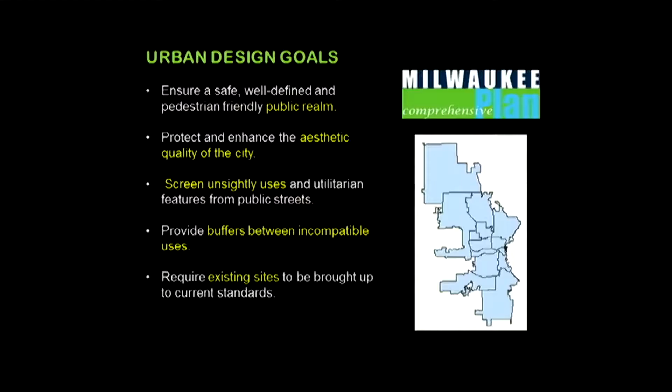Equally as important, or possibly more important, becoming more and more important nowadays, especially since the last code was revised, is environmental goals. We all know Milwaukee is going to continue to see more intense storms. We can either try to build our way out with increased sewer capacity, more deep tunnels, or take the approach of green infrastructure, which we're doing citywide. We've recently updated our Chapter 120 stormwater requirements, but the idea is there's an environmental purpose, not just a design purpose, to this landscaping.

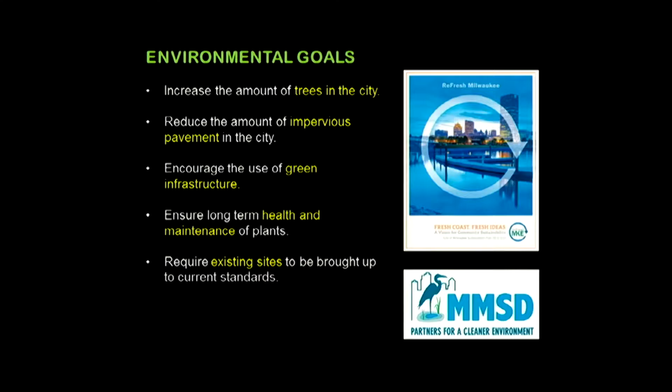So how do we encourage properties to capture rainwater where it falls, keep it out of the combined sewer system, keep the crud from getting into our rivers and lakes, so we can protect those resources for many generations to come. That was interwoven into this as well.

Part of the reason why I show these three types of goals is to say that they don't always go hand in hand. It's hard to make things good for the environment and easy on business, or to provide that urban edge while also capturing stormwater. So that lays the framework for when we went about developing this code, why when we put something in there, we made sure it was important for a specific purpose.

Back to the customer service element real quickly. I don't expect you to read anything on here, just as a message to see how this was the old table, and how intimidating it could be when you were first told your parking lot has to comply with 295, 405 of the landscape code or zoning code. This is the first table you'd be pointed to.

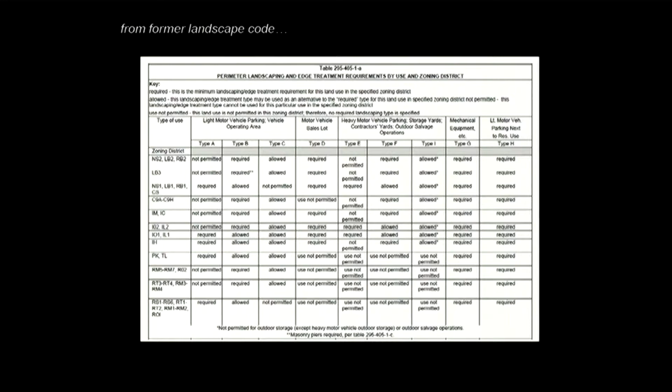Generally you had to figure out what use you were trying to screen, what zoning district you were in, and depending on that there are various types. Some types are prohibited, some are required. You generally have a type required and then a type allowed, and it wasn't always clear how one could be required while another was allowed. It wasn't always the clearest to understand, especially for small business owners trying to do a small project. But this table was just to figure out which type you may need.

Once you figured that out, then you went to this table, which is equally as intimidating and very prescriptive. It grew over time as we tried to build in that flexibility, tried to build in new types, and sometimes they contradicted each other, with asterisks, and things just grew over time.

So when looking at how we could make this code more user-friendly, we made the decision to start from scratch and think about what's really important. So that's the new table—much bigger, much more contrast, and there's no types, there's options.

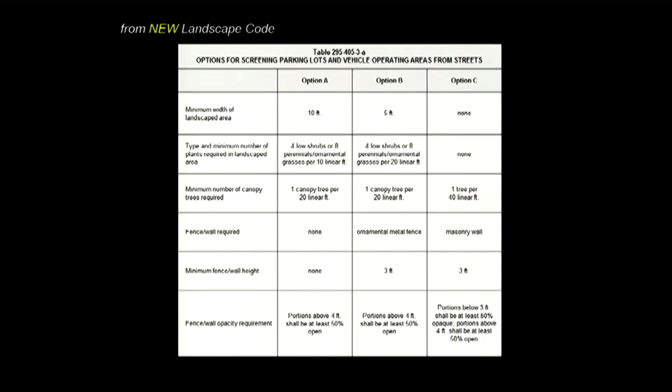If you have a parking lot, you have basically 3 options you can do. It's the same citywide, so there's no different standards for our more suburban districts than our urban districts. There's options, and depending on your specific site and its needs, you pick which option works best for you, or a combination of them.

You may have a site in a suburban district but you're really tight for space—a small site that happens to be in a more suburban district, or vice versa, in an urban district where you have the space to provide that green space. We should promote and incentivize that if you can do it.

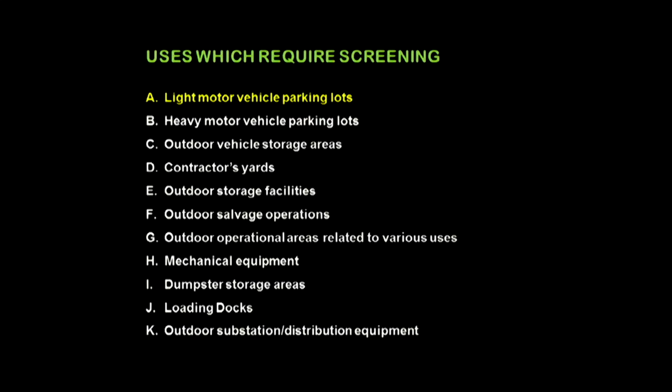We require screening, mostly landscaping along the street edge, for a lot of uses. Today I'm going to focus on parking lots, because that's what we deal with every day. That's the most common thing, and that's what the guide is designed to address: landscaping and screening for parking lots. There's also a series of other uses, like outdoor salvage, that require landscaping and screening, but you'll have to go to the code to figure that out. Today we're talking about parking lots.

Basically, there's 3 requirements. There's screening from public streets, which is really about that urban design, that pedestrian friendly, making the city look good landscaping along public streets. There's screening from residential districts, which is basically about protecting a neighbor from what might be going on in the parking lot, from headlight glare, noise, dust, those types of things.

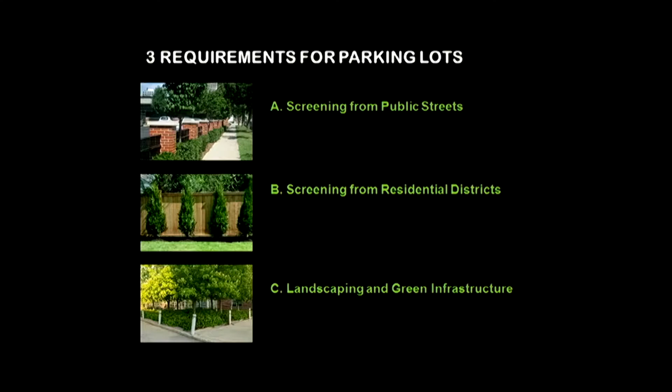A subtle but key change in this is it's screening from residential districts. It used to be screening from residential uses, which meant if you had a home in a commercial district next to you, you'd have to screen that home, even though you're both in what could be a dense local business district. Now, if you have a residential use in a local business district, which is allowed and encouraged, but you're in a commercial district, the screening is about protecting residential districts from commercial and industrial districts.

And the last is landscaping and green infrastructure overall. Now, your screening from streets and districts counts towards that overall landscaping, which is another key change that I'll get into in a little bit.

Real quickly, screening from public streets - why do we require that? Well, it's about promoting a well-defined and pedestrian-friendly public realm and making sure the city looks nice. So we can't just pave up to the sidewalk everywhere, because if it happens here or there, it can get by. But when you have whole corridors where it's just asphalt, where the building edge has been eroded and that's not mitigated, it's really hard to make a nice, vibrant, pedestrian-oriented district.

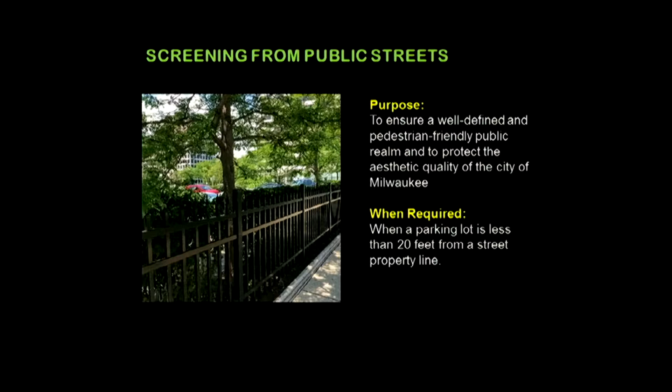And similarly, it's hard even in suburban areas when you have that - it just doesn't look attractive. So that edge is really key. It's required when the parking lot is less than 20 feet from the street property line. So if you have the space and want to set your parking lot back 20 feet from the property line, this doesn't apply to you. But you have that benefit for having that space, that pervious surface in between, where you can accomplish some other landscaping.

So this is the table from the guidebook. You can look along in the guidebook, but basically it's 3 options.

Option A is a nice, generous border. You don't need any fence. That was a big thing - we used to require fences in almost all of our districts, and a lot of people gave feedback saying, why do you require the fence? It has no ecological function. It's not sucking carbon, it's not sucking stormwater. Why do you have the fence? It gets knocked over. Of course, the architects would say that fence is key to creating that urban edge. So as a trade-off now, if you give us a nice, generous border, big enough where the trees are actually going to thrive, they're not going to be these twigs - they actually grow into nice, mature trees - you don't need the fence.

The second option, if you have a more standard border like we've always required, you give us that decorative metal fence and your trees. It's similar to what we currently have, but with less shrubs, about half as many as we used to require. The former code had something like 2 rows of shrubs spaced 4 feet on center in each row. So it was very prescriptive - it basically mandated a hedge.

So hedges are nice, we like hedges. If you want to do a hedge, you're more than welcome to. But what happens if 5 years later one of the shrubs dies and it comes out, and all of a sudden that person's non-compliant with the code? So we said, in the spirit of flexibility, allowing landscape architects creativity, of course you can provide us a hedge, but that's not all you can do - you can do other things. One thing we added is you can now do ornamental grasses, you can do perennials. So there's a variety of ways you can meet that lower edge requirement with less shrubs.

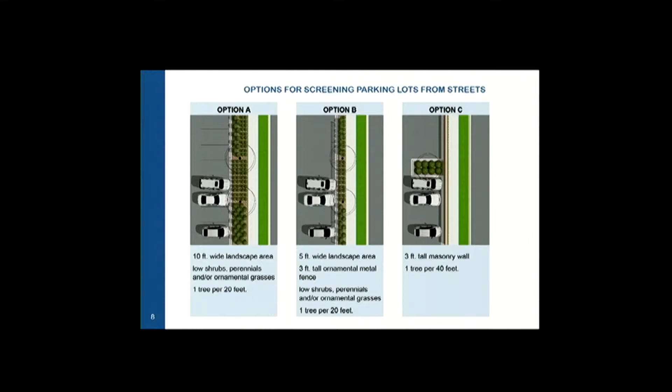Three options, citywide, for parking lots. Doesn't matter if you're in LB1 or RB2, or if you have a parking lot for a grocery store or an apartment building. It's the same across the board. If you have a parking lot in the city of Milwaukee, you pick one or a combination of these options whenever your parking lot is less than 20 feet from a public street.

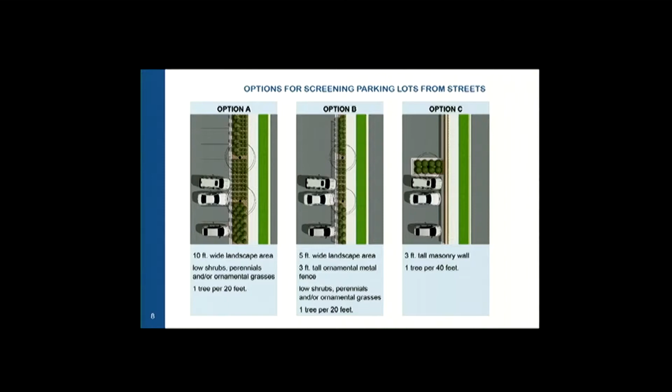So option A, as I said, a nice wide border, no fence, shrubs, perennials, or grasses, or a combination. This shows a little bit more robust than we'd actually require, and a row of trees. Another thing about the trees is we do require one tree every 20 feet of frontage, but they don't have to be 20 feet on center. So you take the frontage you have, divide it by 20, and that's how many trees you have, and you can group them. You can put them wherever they're going to grow the best, put them where they're going to thrive. There are some limits on how far you can go without a tree.

And another key point is the trees in the right-of-way now count. We heard a lot about, we'll have a street tree there, I can't plant trees because they're going to get shaded out. We can debate whether that's true and what type of species can do, but then it would go to a Board of Zoning Appeals case. So it's just, no, if you have a tree in the right of way, it counts. Now if that tree later gets cut down, you wouldn't be in compliance any longer, but that comes specifically in handy when you do option C and you don't have the space to deal with it. So it counts in the public right of way. We went back and forth about whether that should be the case.

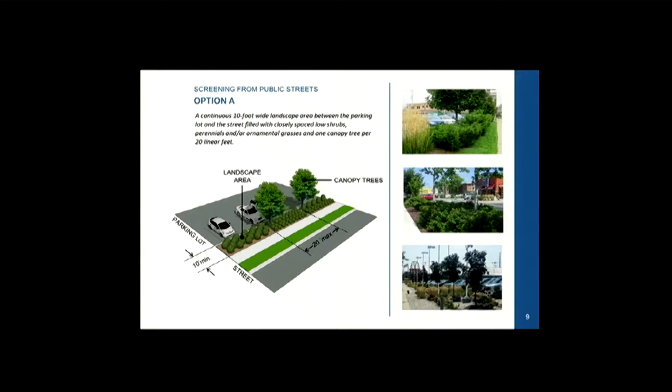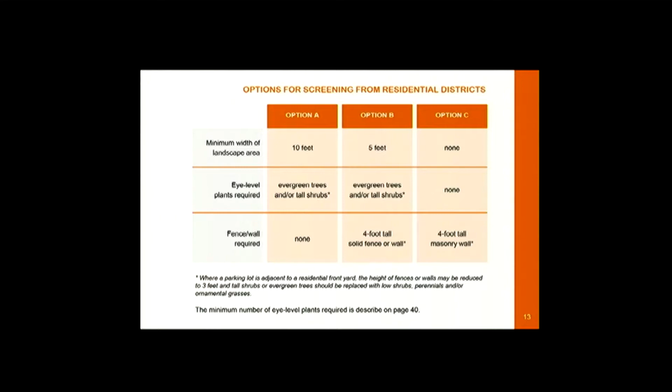The next type of requirement, screening from residential districts. This is less about the street edge, about the urban design, quality of public space. This is about protecting neighbors from noise, dust, headlight glare, those types of things. The old code would basically require a wood fence and a row of tall shrubs or evergreen trees. You can still do that now, that's option B. These options are very similar, same concept as the last ones, right? Option A would give us a more generous border where you can really grow that dense vegetation, we don't need a fence. Or if you just don't have the space, put up a masonry wall, something permanent, that can give us confidence that the residential district will be protected.

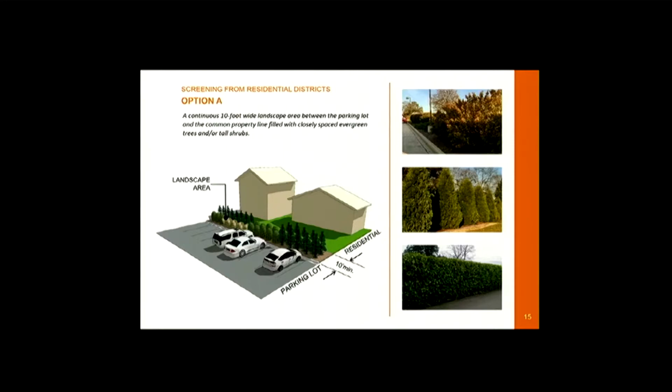So again, now in the street edge landscaping, we want visibility. We want to be able to, we don't want to hide the parking lot, we want to define the spaces. In the street edge landscaping, we want to be able to see in. When you're protecting from a residential property, we want opacity. And this is also the case when we're screening salvage yards or things like that, kind of things where we don't want to see versus things we want to see. In the street edge, we want to see in, we want to see what's going on, we want that visibility, we just want to define the space. But when we're screening from residential districts, we want a barrier.

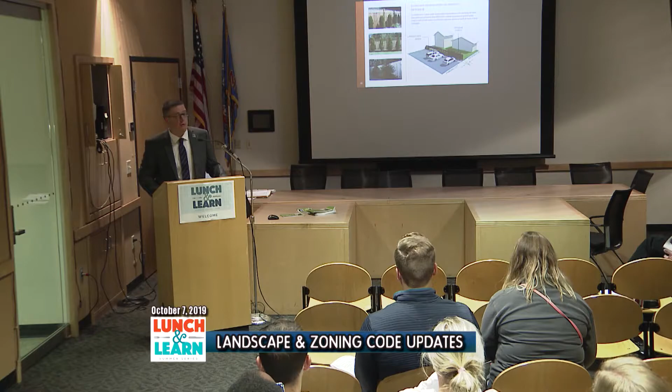Overall landscaping. Now, the purpose of this really focuses on that environmental goal aspect, right? This is about improving water quality in the rivers, lakes, in Lake Michigan. This is about reducing floods, reducing the city's long-term obligation for our sewer maintenance, and making us a more resilient city for what's known and unknown that'll come.

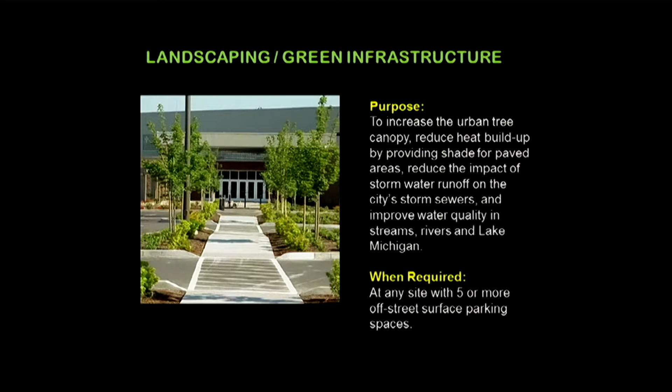But that's very difficult to achieve in the parking lot. You plant a tree next to the parking lot, it didn't count. So we got a lot of these little 5x5 boxes with the twig in it, and it gets covered in snow. But you could have a grove of trees next to the parking lot thriving.

Our requirement now for landscaping is overall - whether you want to put in islands in the parking lot, that's great. If you put it next to the parking lot, that's great too. Put it where it's going to grow. Put the tree where it can survive the best.

So we still require one tree for 4 spaces, but now it's an aggregate. So all those trees along the street edge that didn't used to count, now they count. And you can put them anything within 50 feet of the parking lot - even if it's in the right of way, it counts.

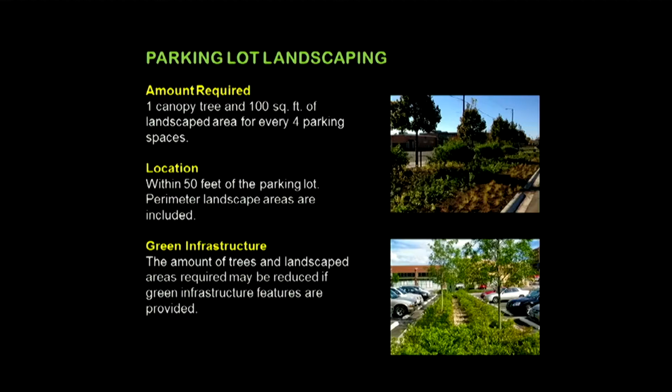And we now introduced green infrastructure. So green infrastructure is not required - I would argue trees are green infrastructure, right? But if you don't have the space, or you don't want to plant all those trees, you can reduce that requirement by adding some green infrastructure.

So if you want to save space and you want to put in permeable paving, you can park on top of it. For every 100 square feet of permeable paving, which is less than half of a parking space, you can get rid of one tree and one 100 square foot of landscape. You reduce that requirement by one tree.

Same with the rain garden, which is really just a landscaped area designed to capture water as it runs off. 100 square feet of rain garden, you don't need your tree.

Bioswale, 50 cubic feet, which is similar to that, but not all bioswales are created equal. So really that 375 gallon capacity, you reduce by one tree and 100 square feet.

And these are not big numbers - they're very achievable. So while our requirement is slightly less than it was, it's still very hard to meet and ambitious. And if you are willing to give us some green infrastructure, you have a real incentive to do that, because you can really reduce your requirement. You can save space, and of course, it has to do with the catchment area too.

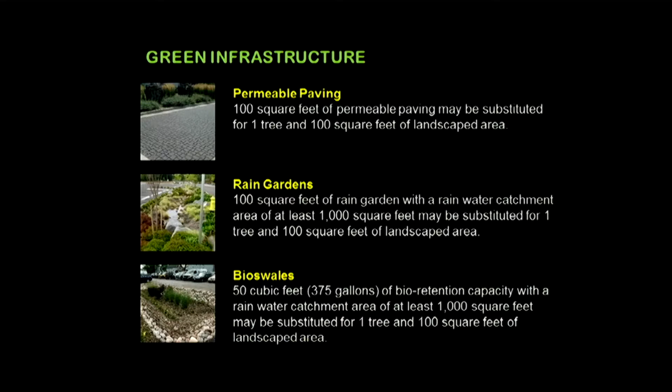So, 50 cubic feet of bioretention with a catchment area of 1,000 square feet - because we don't want you to put a bioswale on top of the hill, right? Water doesn't flow uphill. But that's about the first half inch of rainfall that falls on your parking lot that will be captured and saved from the sewer.

So that's kind of the 3 requirements that we have for landscaping: screening from streets, screening from residential districts, and landscaping and green infrastructure. So if you want to reduce that overall tree planting requirement, you can do that by giving us some permeable paving or bioswales or rain gardens integrated into your site plan, and use that however it makes sense for your particular site.

A few more things I'll point out in the guidebook that you should all have. As we laid out some of the standards for the various elements that you'd combine to meet these requirements, the code itself, if you go and look at it, is much more substantial and has a lot of definitions and a lot of things, but there's some highlights.

But a few things I wanted to call out on this page. Planting area for a tree - you need 100 square feet of surface area for a tree, so no more 5x5 boxes. They kill trees, right? We're not going to stop you, but it's not going to count towards your requirement. You need 100 square feet, which is really 10 by 10 or 5 by 20. You need space for that tree to grow, otherwise it's never going to see its full potential. They were telling me 300 square feet, so this was a compromise - that 10 by 10.

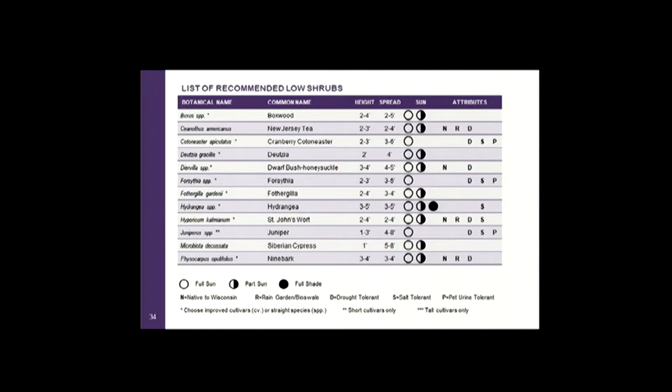Again, species of shrubs that have worked well. One thing I'll credit one of my colleagues for encouraging us to add is whether or not a shrub is pet urine tolerant. We all kind of chuckled when we were told that, but it's true. Especially downtown or in dense mixed-use areas where there's a lot of development and residential units, people have dogs, and dogs from the apartment building next door just come and pee on the landscaping and it dies anyway. So we have indicators of what shrubs are pet urine tolerant.

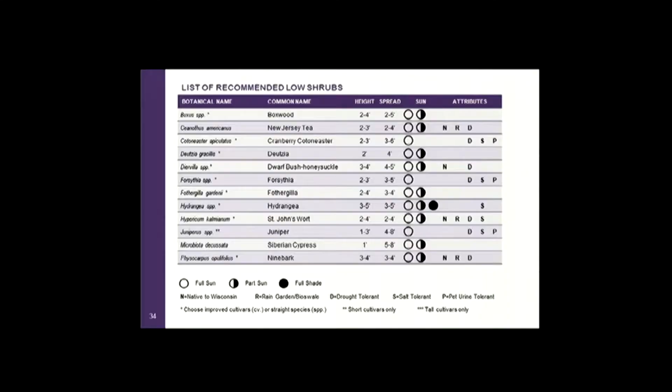That wasn't always designed with these same goals, wasn't designed with threats of climate change in mind, wasn't designed with appreciation of the public realm. So what do we do about sites like this? Is this there for perpetuity? Is there a way that we can compel this property owner to make some changes, even if it's not all the way there, to keep that water out of the streams and the rivers and the lake?

So what we did in this code is we added an applicability section. It's not in the guidebook, but the last section of the guidebook talks about standards for existing sites, which are less strict. But when are you required to install landscaping? The old code said you're required when you build a new parking lot or reconstruct one. But reconstruction was never really defined, and it generally meant starting over from scratch. So repaving and that kind of work wasn't considered reconstruction.

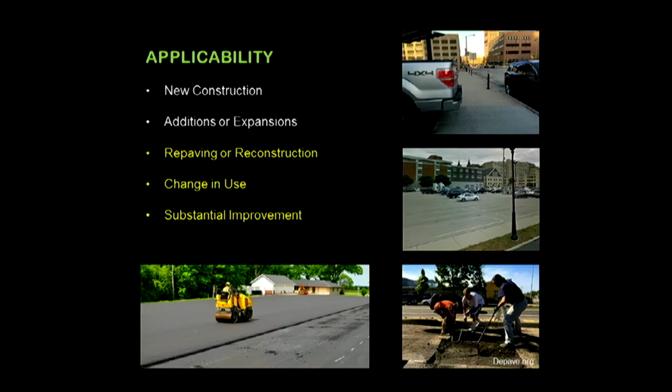You see up there it says change in use - I'll clarify, that's a change in use of what's being screened, not a change in use of the property. So if you have a parking lot that doesn't meet the standards and it becomes a salvage yard, you've changed the use that's being screened. But going from a rug store to a restaurant is not a change in use in this context. I should clarify that in the slide.

And then there's a substantial improvement to the property, which generally means if you completely renovate the building, you can't just leave the parking lot alone. So this guy can't knock down that strip mall and build a new one without addressing the parking lot. In the code it gets very detailed and specific about what triggers what, and so far there haven't been any huge crises because of this. But this was a big move by our policymakers - it wasn't DCD per se that decided this. It was amongst all of us talking with each other about what to do about those sites that are just in perpetuity the way they are.

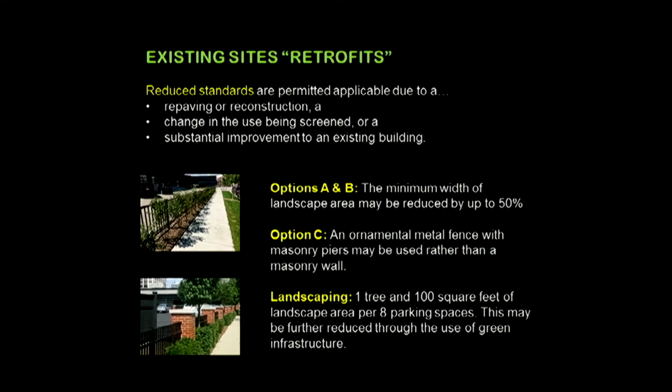We also understand that retrofitting sites has specific challenges. A site that was never designed to have this type of green infrastructure - retrofitting it has its own challenges. So maybe we don't need to make them go all the way, so we have some reductions. For option A and B, the one with either the broad landscape area or the more standard landscape area with an ornamental fence, you can reduce that width in half if you're an existing site required to comply. So if you need to save your paving, and you don't have that 5 feet, what do you have, 3 feet? Okay, do the 3 feet, that's fine.

You don't need to go to BOZA, it's just built into the code, there's no need to go to BOZA. If you want to do 10 feet and don't want a fence, but you only have 6 feet, well that's fine, do your 6 feet. There's no BOZA required, it's built in. And then option C, that masonry wall - those are expensive, especially for a retrofit. So instead, give us an ornamental metal fence with masonry piers, a point-based pier system where you can avoid any underground issues, and that's all you need. You don't need ground level landscaping then.

That's for retrofit. So a lot of times buildings would come to the Board of Zoning Appeals for landscaping or for something unrelated to landscaping. Say you had a daycare center, and for some reason our policymakers decided we don't like daycare centers so much that we need to regulate them sometimes. So they'll be there for that special use privilege, and we'll say, oh, while you're at it, landscape your parking lot. Well, if a cell phone store had moved in there instead, we wouldn't have had any leverage to get them to landscape their parking lot. So part of this is about leveling the playing field and making us more consistent.

But in the case of BOZA, whether it's for landscaping or another use, in general there'd be a compromise somewhere in the middle between what we require and what they can do, and we'd settle on that compromise. Then it becomes the specific requirement for that site, and ten years from now we'd have to find that file and figure out what their landscaping plan was, what conditions there were, and how many shrubs they needed. Well, this just puts that compromise right into the code. So if you can meet this, you don't need to go to BOZA.

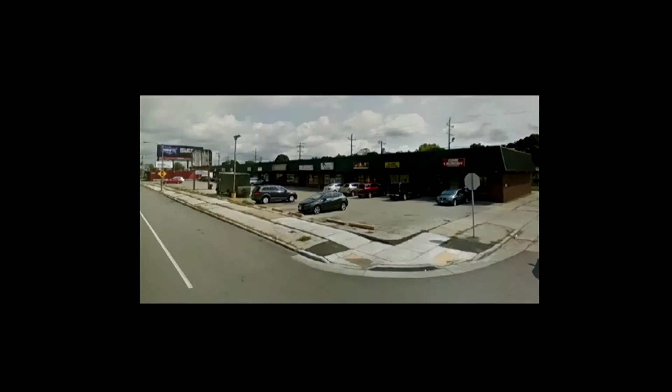Here's another site that's tough. Generally, a double-loaded parking bay is 60 feet wide, you guys in the development industry know that. They probably recommend more like 63, 64, but 60 feet wide is standard. These guys have about 52. So when they say, how much space do you have for landscaping, well, they have negative 8 feet. It's not like you got 63 feet and only need 60, so you can put in a 3-foot strip. They don't have the space.

Can this building owner tell all those tenants that he's going to lose half their parking spaces? They're probably already feeling, whether it's real or perceived, that it's limited.

So what are the solutions? The old code would basically knock out half the parking to put that edge in, or require it, or at least 25% requiring it to go parallel on one side or angled.

This site was brought to my attention because they applied for a facade grant. They had a great proposal into our commercial corridor team that they wanted us to take a look at, and they really renovated the building. It looked great. I said, well, what are you going to do about that parking lot? It looks terrible, but I can feel for them. What can they do?

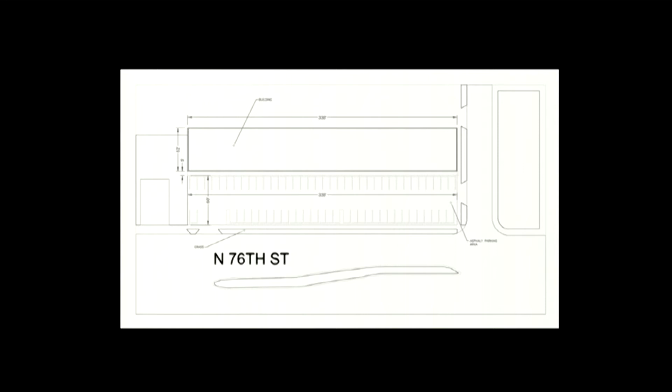They gave us their proposal, and this is what they're planning, just to rebuild it the way it is.

This was kind of while we were developing the code, but I came up with a little sketch for them. What if you used a combination of things? Sometimes you had a buffer, you strategically took out some spots, you put some ground plantings near the sign. Some spots you don't have that strip, but you have an ornamental metal fence. This would have come nowhere near close to meeting the old code, but under the new code, this can actually accomplish that. And they liked this so much that they're now implementing it.

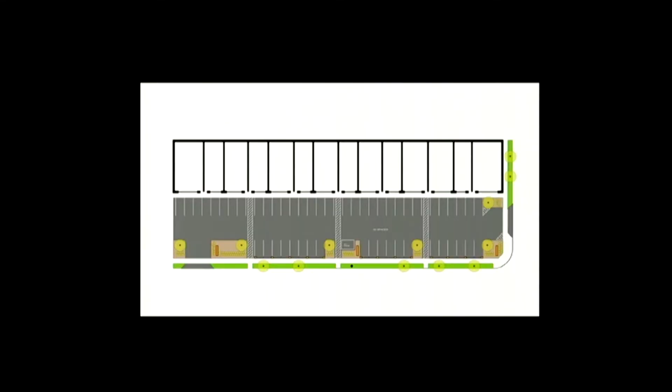So they're taking out the asphalt between the sidewalk and the curb, planting trees in there, in partnership with our DPW, of course, and those count. So it was a real win versus just giving them a variance and saying, oh, it doesn't fit, get a variance.

Last thing I'll say before I turn it over to Q&A: when we spoke to the council committee about this, when we came and presented this at council for passage, we partnered it with some grant money. We know that a lot more sites now are going to have to be made to come into compliance than they were before, so we also rolled out a grant program, we're calling it parking lot beautification grants.

It's actually administered through our eco office. But we wrote this a little differently than our facade grant, so there's no going out and getting 3 different quotes and dealing with all that, because who are we to evaluate a landscaper's quote. We just said, let's give them a base amount per element.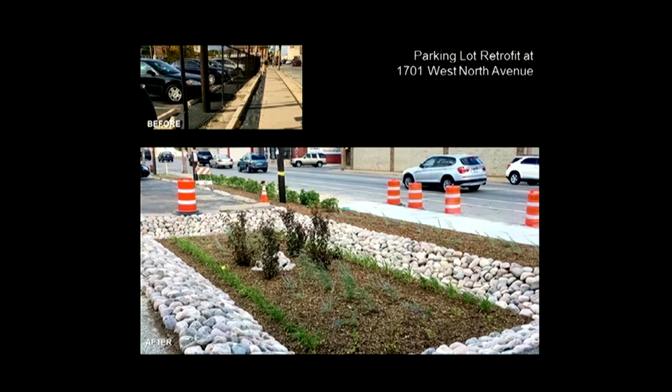Quickly, an example: this is West North Avenue, over by Wellness Commons. You can see the before above. This is the Social Development Commission's parking lot, and you can see the chain link, the curb, and the asphalt there, and then the new retrofit that was done. Very simple - just took a couple parking spots out and made a nice bioswale and a row of rose bushes along the street. It's quite pleasant, a big improvement.

We also have Milwaukee.gov/zoning code to read the code. If you're trying to design a parking lot, or you have questions about specific sites and you're familiar with zoning code and think you can handle it, I'd encourage you to go look at the code. We tried to write it as user-friendly as possible. Of course, our lawyers and our Legislative Reference Bureau like to add a lot of Old English into it, but it was meant to be user-friendly.

So thank you all very much. And again, my colleague Ed's here. If you came to learn about something other than landscape code, sorry that you had to sit through that, but we're willing to take your questions about this or about any other zoning related topic you may have.